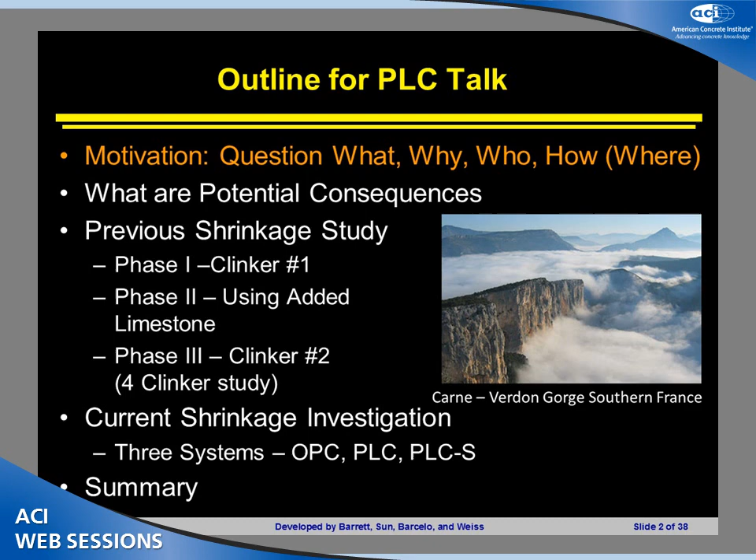What I want to really do now is talk a little bit about the motivation, talk about the who, what, when, why, how of Portland-Limestone cement, and then I really want to jump into discussion on shrinkage because this has come up at several of the different talks. I think there was a lot of information presented before in Toronto, and I think Paul did a very nice job talking about some of the other properties.

So today I really want to focus on shrinkage after we get through the basic motivational questions. As Paul mentioned, Portland-Limestone cement is now currently in the cement specifications, ASTM C595 and AASHTO M240. Here's a picture of a typical Portland-Limestone cement. When you look at it in the microscope, the particles aren't actually different colors like this—that's been added afterwards—but it gives you an idea of what's going on. Basically, the white particles here are the typical clinker portion of the cement, and the yellowish particles are the limestone in this case.

Paul covered quite a bit on the background, but we're looking at really 5 to 15% additions. One of the things I will keep coming back to when we talk about PLCs is that we're really talking about interground materials. I will give a slide or two on materials where limestones have been added, which is a little bit different than the interground materials. But what we're really focused on here is interground limestone as part of the production process.

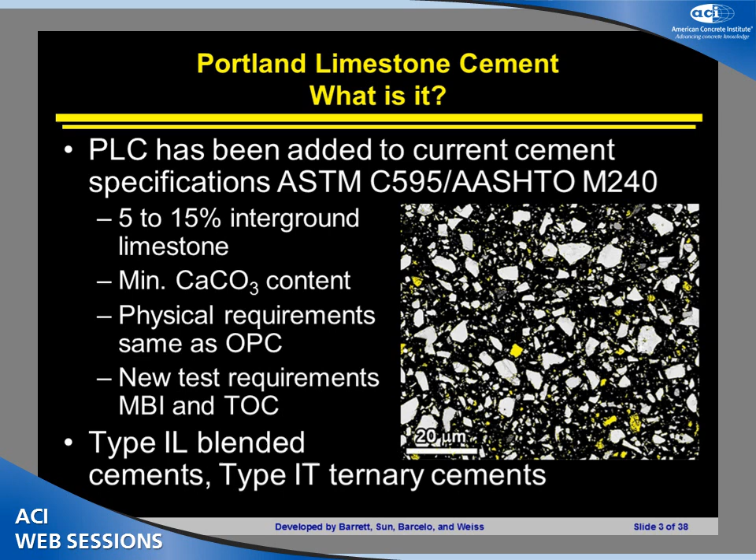The next question, now that we know a little bit about what it is we're talking about, is why do we want it? The real reason is really looking at the sustainability issues associated with cement production. You hear people talk about numbers as high as 7 or 8%. Here you see a pie chart where the numbers are about 5%—5 to 8% of the world's CO2 production comes from the cement and concrete industry.

And you may say, wow, that's a really high number, cement must be awful. Well, one thing we have to remember is concrete itself has a relatively low carbon emission, but the fact is we use an enormous amount of it. We use a lot more than any other material, and even though we have a low carbon emission, we're looking at ways to make this better, because if we can reduce this number, that's good for everything.

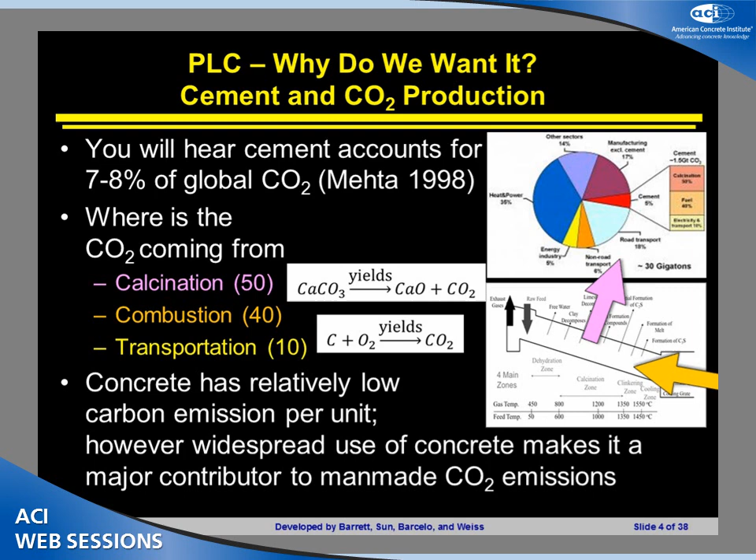About 50% of that CO2 is coming from the calcination process, 40% is coming from the combustion process, and 10% from transportation. If we can replace some of that clinker, we can really act to reduce some of the CO2 coming from calcination, some of the CO2 from combustion, and substantially reduce the CO2 being produced with that concrete. So the real big takeaway on why we want it is, again, the sustainability issue.

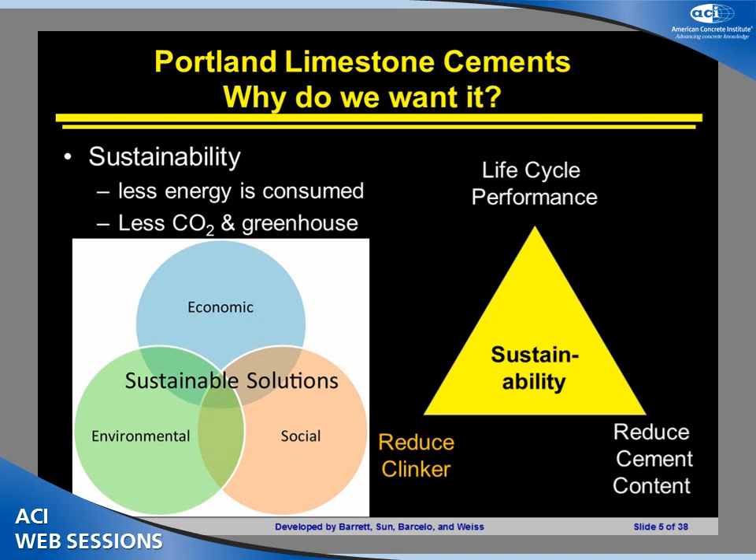So I would say there are three main areas we can focus on. We can reduce the cement contents in our mixtures, and I think this is a good thing not only from a sustainability issue, but there are cost benefits and durability benefits in doing that. We want to make our concrete structures last as long as possible, but what we're really looking at in this talk is the ability to reduce the clinker and get the same performance. If you can reduce the amount of clinker, reduce the amount of CO2, and get similar performance, it seems like something we should at least be investigating.

The question is who has done research on this. One of the topics that comes up almost every time we talk about this is, wow, this is something new and radical. Has anybody ever looked at this before? There are over 1,000 papers on Portland limestone cement.

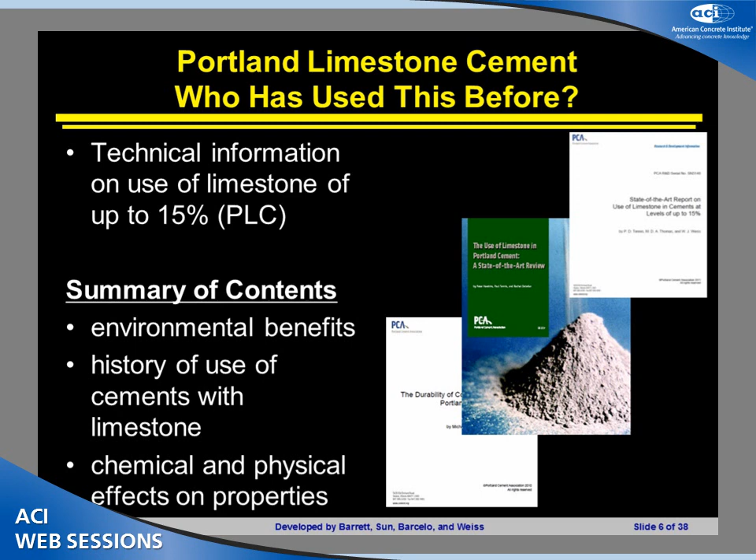One of the nice things that's happened is there have been several review sessions where people have gone through and assembled these documents, and I believe all of them are free of charge. They've taken all the information and put it together. You can download this information or contact any of the authors, but I think they all do a fairly good job of summarizing what's out in the literature and what the rest of the world has experienced with Portland limestone cements.

One thing I'll slow down to talk about is really the how, because this differs from what we see in a lot of different applications. In the North American experience, the real thing we keep coming back to is we're targeting similar performance to OPC. So one of the things we keep coming back to is that we're using less clinker.

By using less clinker, we have less clinker in the system, so we're diluting the clinker a little bit. Typically what we're going to see is the cement is ground finer. So in general, Portland limestone cement is going to be ground finer than OPC. One of the reasons for this is to overcome dilution.

So if you look at a normal strength development curve for OPC and compare it to PLC, we're grinding it a little bit finer. We're going to see more rapid strength development initially, and then we're going to see that rate of strength gain slow down a little bit. But this is mainly influenced by the fineness of the material.

The higher fineness helps us because it can act like a nucleating agent, as Paul mentioned. It also helps us because it can improve particle packing. The other thing I'll mention is, and there'll be a talk on this tomorrow, PLCs show substantial benefits when you start using them with other supplementary materials.

We'll talk a little bit about that today with slag. Tomorrow we'll talk extensively about that with fly ash, where you can see substantial benefits. So even though we typically say similar performance, there are times where that performance can be greatly improved.

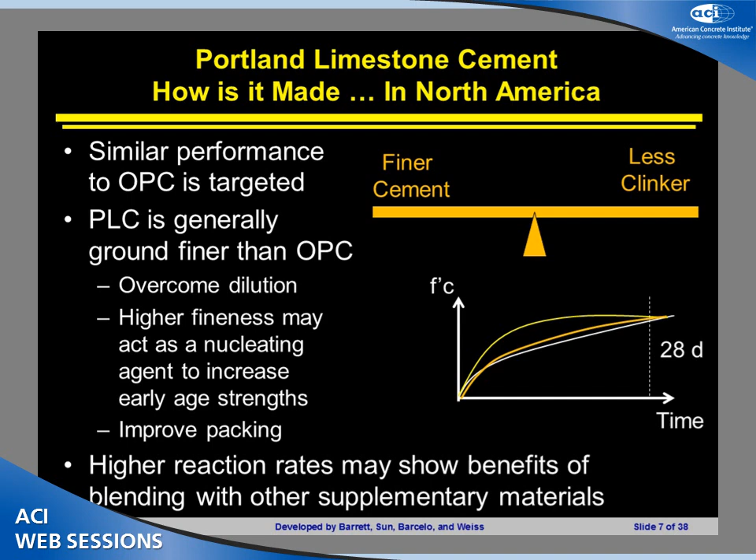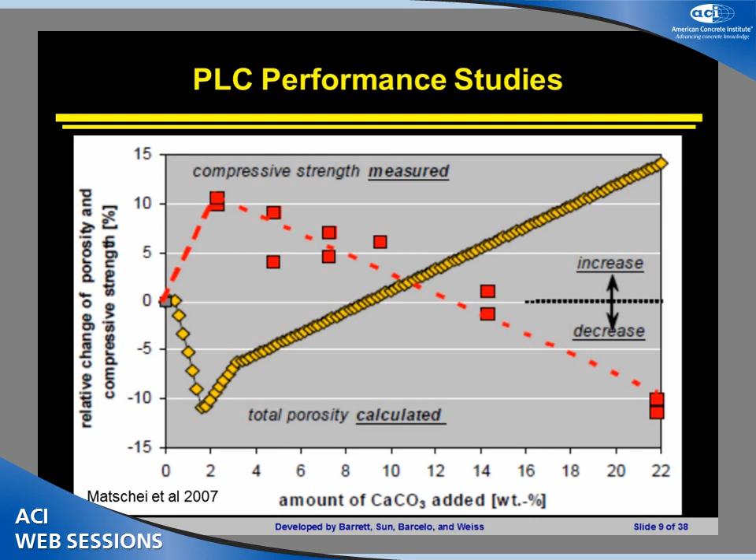So a couple things we'll talk about are really what are the potential consequences of using Portland limestone cement. I'm going to skip this slide because I think Paul did a great job talking about the reduced porosity and increased strength. But I really want to get into this discussion of fineness and shrinkage.

One thing I really want to talk about here is there are a lot of reports that say finer cements crack at earlier ages. I'm not going to dispute that with a lot of those authors, because we've authored a lot of those papers too. This is something you can see if you go about this with conventional OPC types of mixtures. Blaine fineness is often used in these studies, and that's often the single measure that we've got.

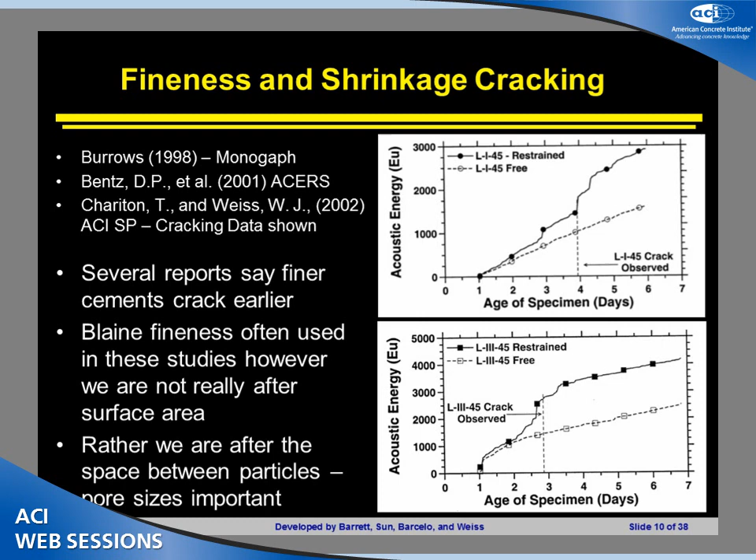I think one of the things that's going to become really evident as we look at this is that Blaine fineness gives us a number, but may not give us the complete picture of what's happening in terms of how these materials behave. So here's a typical OPC that's ground finer, and we see the age of cracking move from about 4 days up to about 3 days. But remember, that's a conventional OPC system where all that's been done is the clinker is ground more and more fine. I think we need to get into this a little more to understand what's going on with Portland limestone cements.

Before we get into lots of data, I want to point out Thomas Young and the Marquis de Laplace. One of the equations we're going to keep coming back to is what's known as the Young-Laplace equation.

Really the idea here is we can relate the stresses that develop inside of the capillary fluid to the surface tension of the fluid, a contact angle, and the size of the pores that start coming up inside of the system. We're going to keep coming back to this idea because what I'm going to talk about is fundamentally rooted in this equation, where if we understand the pore size distribution and how we're modifying the pores and what size pores we're modifying, we can get a direct implication on what we're doing to the shrinkage of the system.

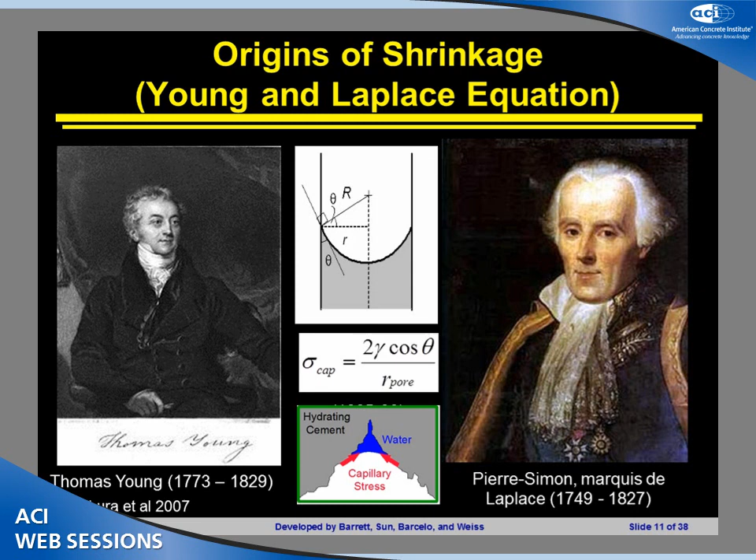To take Young-Laplace to a slightly different level, most of us will remember in second or third grade getting 2 glass slides and running over to a microscope, putting a bug or something disgusting in there, and looking at it. Then you tried to pull those 2 glass slides apart and it was virtually impossible, especially with a drop of water in between those 2 slides. You've got 2 silica-based sheets with water in between them, and high surface tension holds those 2 layers together. That's the same thing we have going on inside of the pores in our system, and this is really what is going to drive the shrinkage.

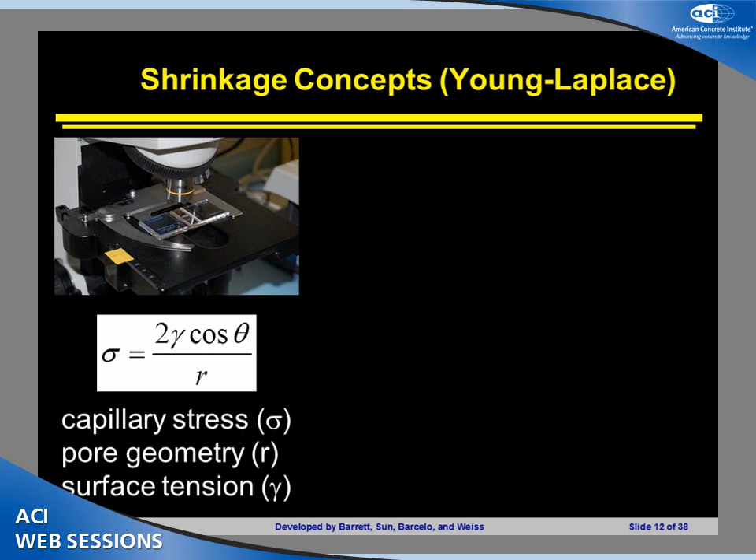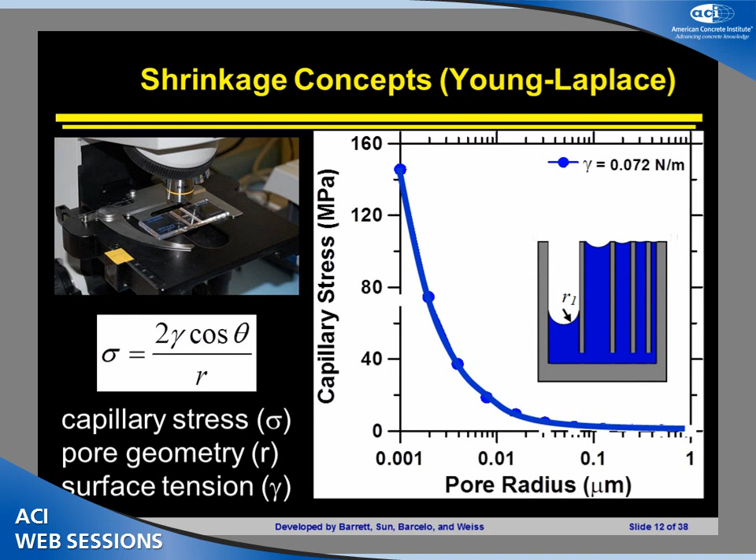Again, same equation that we looked at before: the stress is related to the surface tension divided by the pore sizes inside the material. We will keep coming back to some general plots, but here you can see the idea - the stresses are relatively low with big pores, and the stresses get much, much higher as you get to smaller pore sizes.

Shrinkage is really related to the size of the pores that's emptying. Pores smaller than a few nanometers, we worry about other things. Pores bigger than about 50 nanometers aren't small enough to generate significant stresses. So we're going to focus in on this region - from about 3 nanometers up to somewhere around 50 nanometers is really the range we're interested in for most of the shrinkage we're going to be talking about.

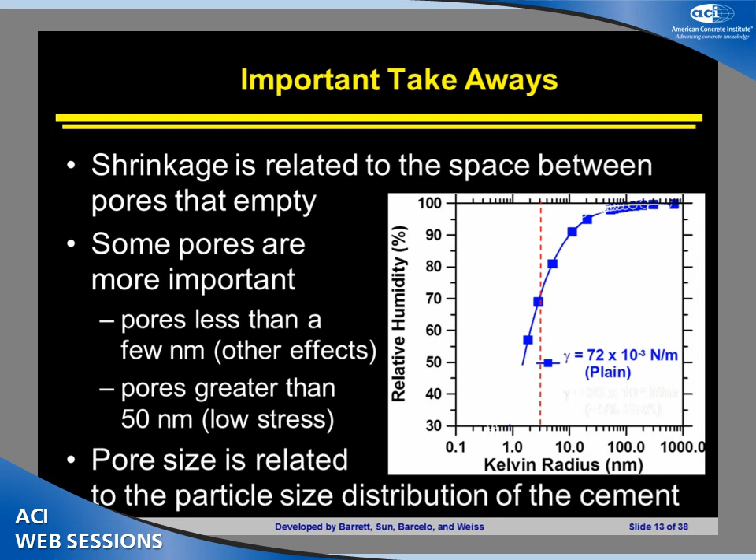Now I want to point this out quickly, and I'll ask you to remember this particle size distribution curve. Here you can see a particle size distribution curve for conventional Portland cements, from one of the studies I mentioned that said finer cements are more prone to crack. What I want to point out is as the fineness has been changed, these curves shift pretty substantially toward the left-hand side of the screen, and the whole curve slides relatively uniformly. I'm going to try to contrast this with what we see in the PLC systems to show you that we get a different particle size distribution, and as a result, a different pore size distribution inside of the material.

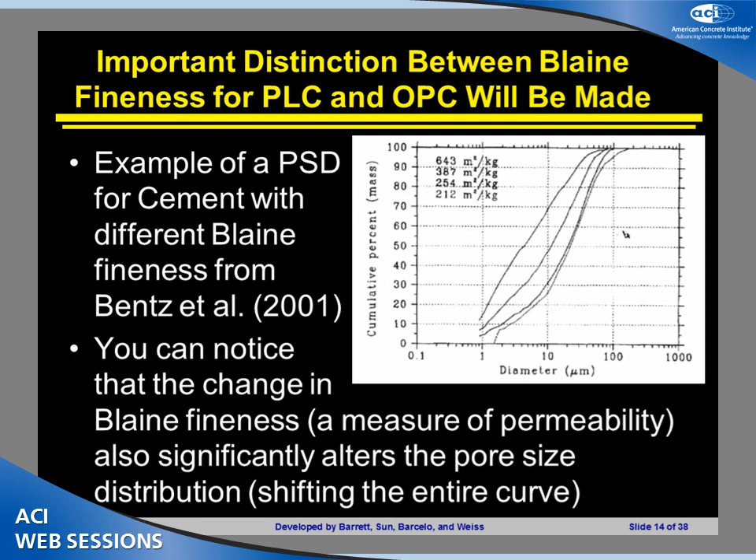So now I'm going to talk about a couple different systems, going through what's probably been a 5 or 6 year study, and we're going to talk about different clinkers. We've got up to about 7 or 8 different clinkers looked at from different commercial plants that I'm going to try to combine into here. We'll talk about these in terms of different phases, but this was not a well-orchestrated 3-phase project when we started - it was, we'll test this particular cement, we'll test that one. Now we're going to go back and look at some of the similarities we've seen in this information.

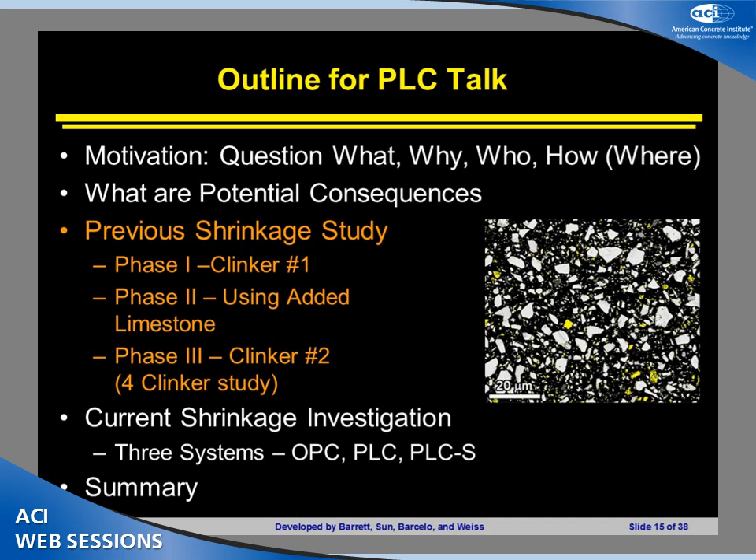One of the first ones we looked at is a commercially ground blended cement - a Portland-Limestone cement, ground looking at 0, 5, and 10% limestone additions. The red line is 0% limestone, the blue line is 5%, the green line is essentially the effect of dilution, and the black line is 10% limestone. If we look at the autogenous shrinkage, we've got very similar shrinkage - no additional shrinkage coming from the ground limestone, even though the Blaine fineness has gone from 382 up to 461. So even though it's finer, we're not seeing additional shrinkage in that system.

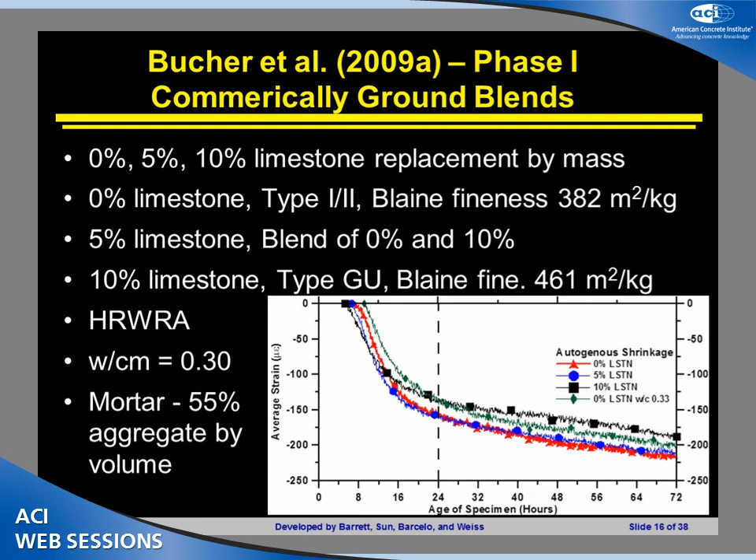In addition to this, we've used a ring test, and I will come back to this a little bit later on.

The ring test is not just to quantify the length change, but to quantify the cracking potential of the material. The idea is we cast a concrete or mortar around a steel ring.

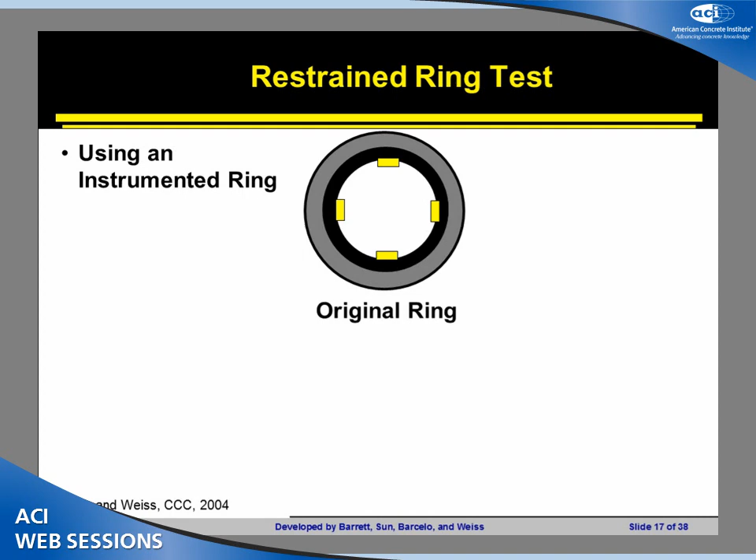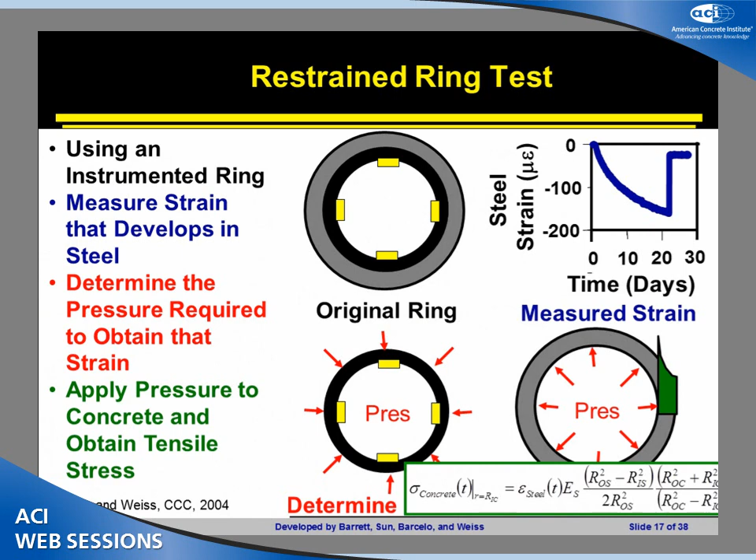The concrete wants to shrink and get smaller, but the steel prevents that from happening. We can measure the strains that develop inside the ring, and use those strains to calculate what the pressure had to be to produce them. We can turn that around and say this is what the pressure and stresses are inside the concrete, which gives us a very quantitative way to talk about stress development in these different concretes.

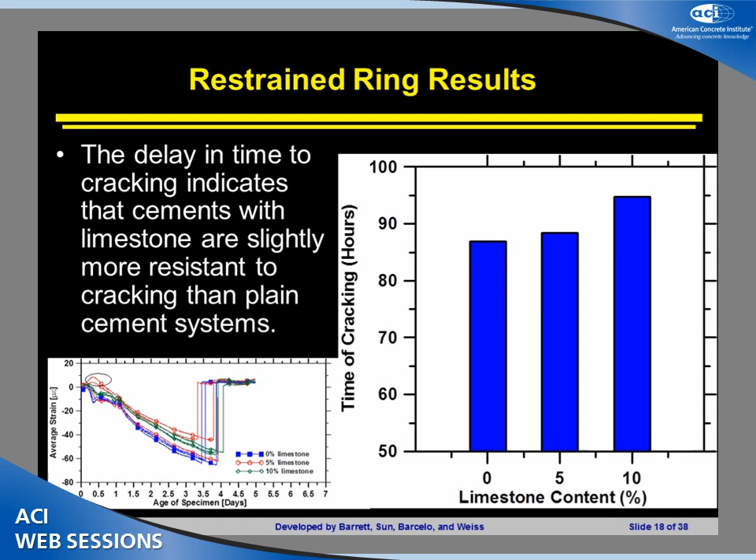One of the things we can look at with these different PLC mixtures: we see a lot of different lines here, the blue is the plain system, the red is 5% limestone, the green is 10% limestone, showing age of cracking. Again, with finer cement, we don't see an increase in the cracking potential, or an increase in the strain or stresses developing inside the system.

One of the other things we did in this study is look at the long-term shrinkage of these samples. We took samples about the size of a piece of chalk, about 4 inches long and 12.5 millimeters in diameter, put them in a CO2-purged environment, and left them for about 160 days to get the full shrinkage out of these pastes.

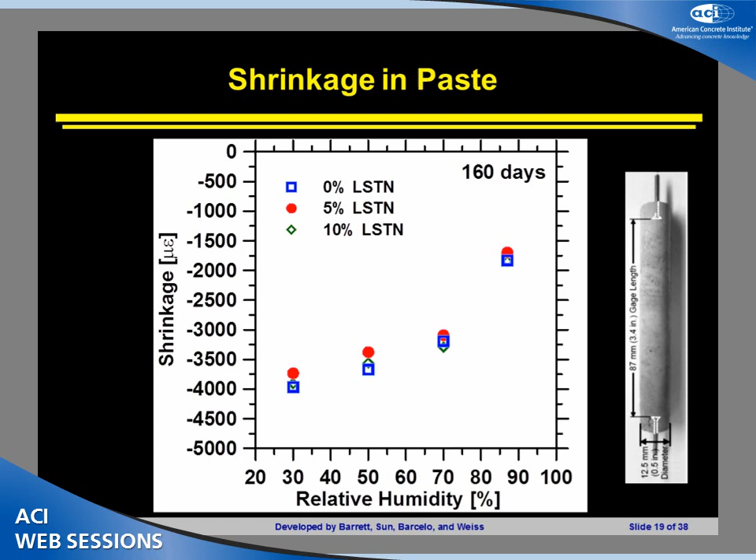What you can see with 0%, 5%, and 10% limestone is the results all lie on top of each other within the statistical variability you'd expect. The main point I want to drive home is that even though we have different Blaine fineness numbers, about 80 points finer for the 10% limestone system, we see identical shrinkage over a really wide range of relative humidities.

Now in the second study, I want to clarify some differences, because it's easy for people to get confused looking at different papers. In this study, instead of intergrinding the limestone, we added the limestone. We're going to talk about small, medium, and large limestone particles, at 3, 17, and 100 microns. I want to point out that these are not equivalent or similar performance systems, unlike every other system I'll discuss this morning.

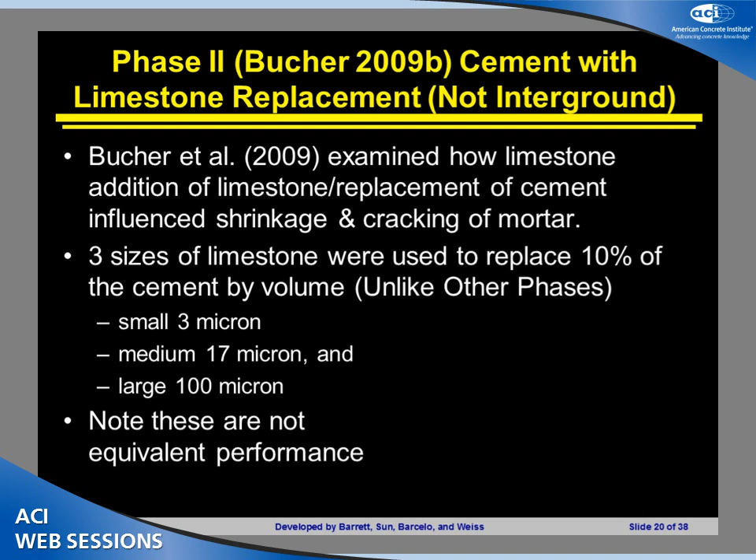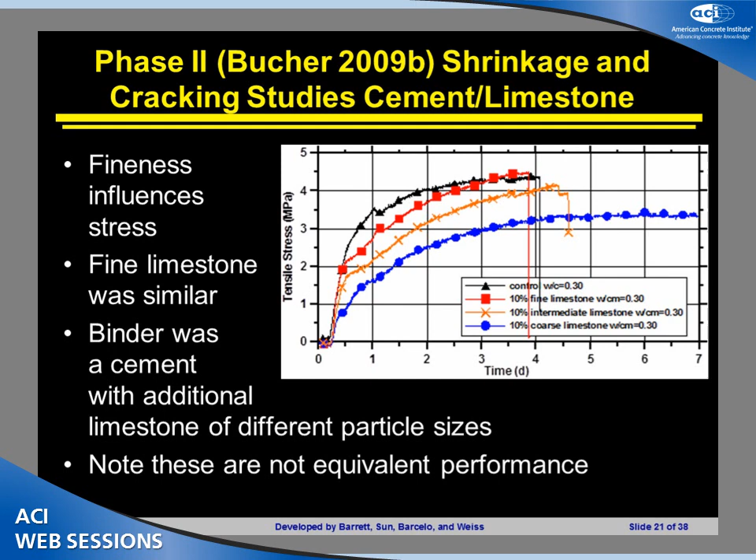When we start replacing 10% cement with 100 micron limestone particles, we notice a decrease in strength, so they're not similar like before. But when we use relatively fine limestone, we see a similar trend in the stresses developing. As we go to bigger limestone particles, reducing strength and performance, we see lower stresses developing in the system. I point this out because it's a different system than the PLC systems we discussed, since these are not equivalent cements and not interground cements.

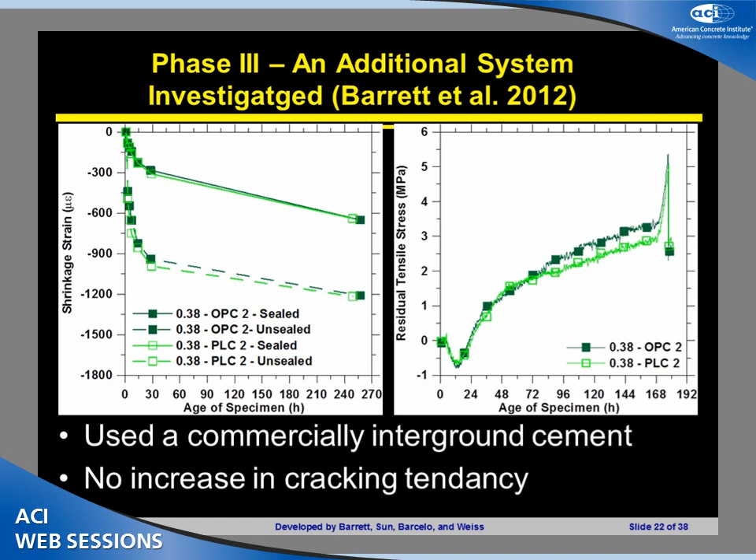The third phase is looking at a different binder, with a 0.38 water to cement ratio. Sealed shrinkage is shown here - the green and light green lines, I don't know why we chose green, I guess to stay with the theme. These are the drying results down here, and these are the sealed shrinkages, and you're hard-pressed to see a difference between those lines. If you move over to the stresses developing in the system, you see maybe a slightly higher stress in the OPC, but they're relatively similar for the sake of what we're discussing.

I want to get into more detail on the final study we've looked at, where we examine the shrinkage and cracking potential in three systems: clinker with limestone interground. All the interground materials discussed here are interground commercially, which uses very different technology than intergrinding in a ball mill in your lab. We're going to look at a 0.39 and a 0.34 mixture, and for time I'll only show the 0.39 mixture with 55% by volume sand.

Here we've got an OPC which has about 3% limestone, a PLC which is 11% limestone, and a PLC slag system which is 10% limestone and 12% interground slag.

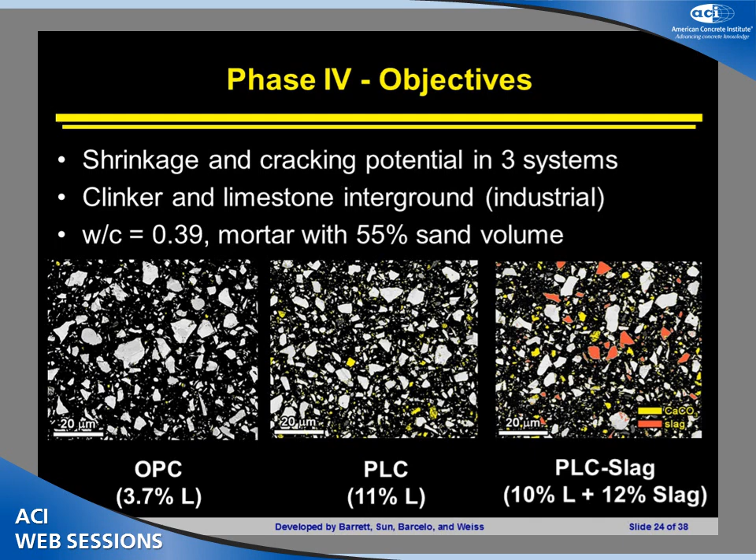So to talk a little bit about this, I want to show particle size distribution, talk about reactivity, talk a little bit about shrinkage, and then the cracking potential.

So the particle size distribution - I want to compare and contrast this to what you saw maybe 10 slides ago. I pointed out that in a conventional system, if you change the Blaine fineness, the curve marches over to the left as it gets finer. Here you can see there's a slight shift to the left, but not that parallel shift. If you look at the frequency distribution, or the derivative of this curve, we're losing a lot of these big particles - 30, 40, 50 micron size - and replacing them with smaller particles in the 2, 3, 4 micron range, and those are the ground limestone.

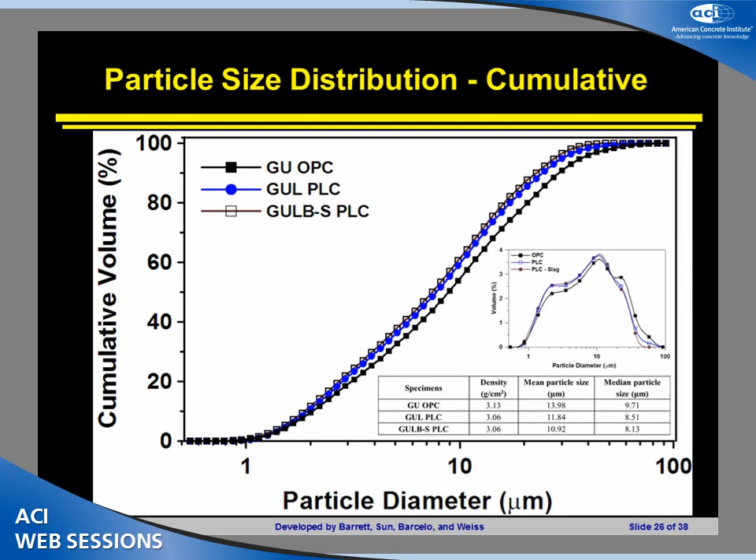So what we're doing is getting rid of, on a microstructural level, the basketball size particles. We're getting a lot of softball size particles, and we're ending up with a few ping pong ball size limestone particles in the system.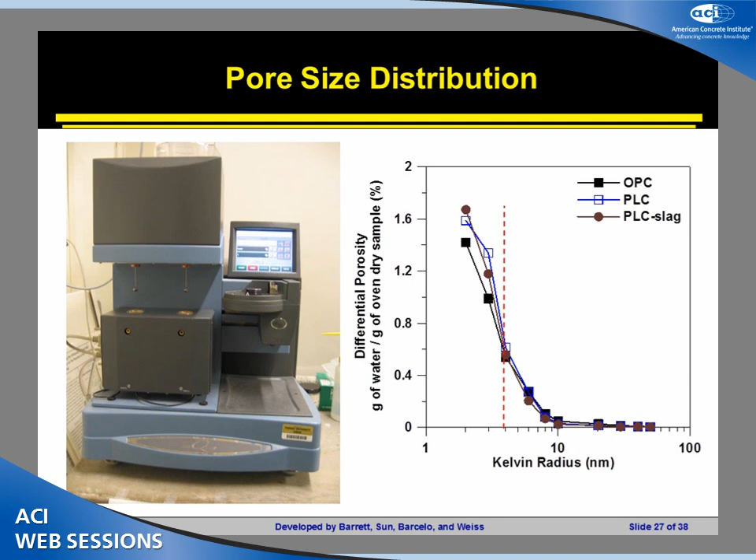We see a slight difference with the PLC and PLC slag systems at about 55% relative humidity, where you might see a slight increase in the volume of pores. But in general, these pore size distributions are very, very similar, even though the Blaine fineness numbers are very different in those cases.

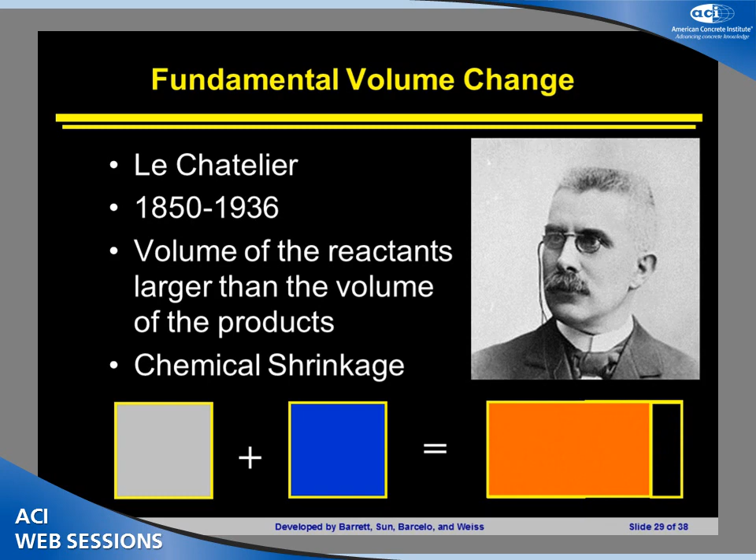So chemical shrinkage - to talk a little bit about this - chemical shrinkage is just a volume reduction associated with reaction. You start out with 1 volume of cement, 1 volume of water, and you end up with something like 1.86 total volumes when the whole system reacts.

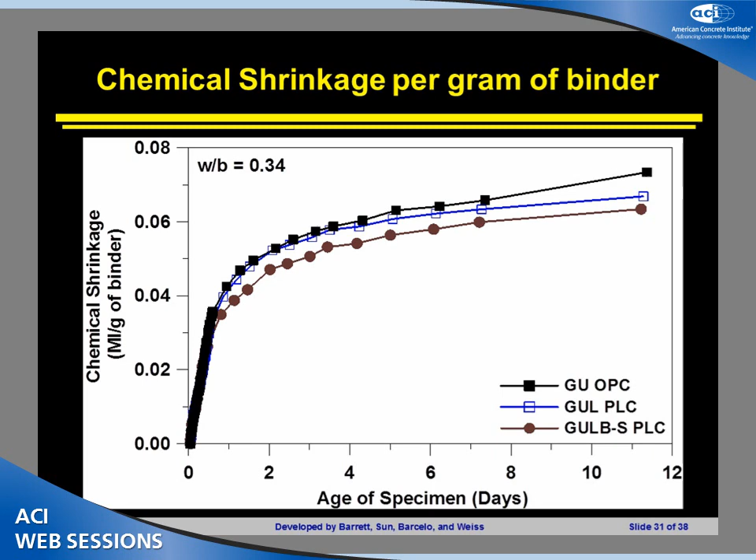This has been observed for a long time, but I want to point out that if we look at chemical shrinkage by binder - by clinker and ground limestone - we notice very similar amounts of chemical shrinkage, very similar reactivity during the first week, with the OPC maybe slightly higher. This is similar even though the system has been slightly diluted, because we've got a more finely ground material - the PLC system is more finely ground. We see the slag system is a little slower due to the slag, but it starts to catch up toward 28 days.

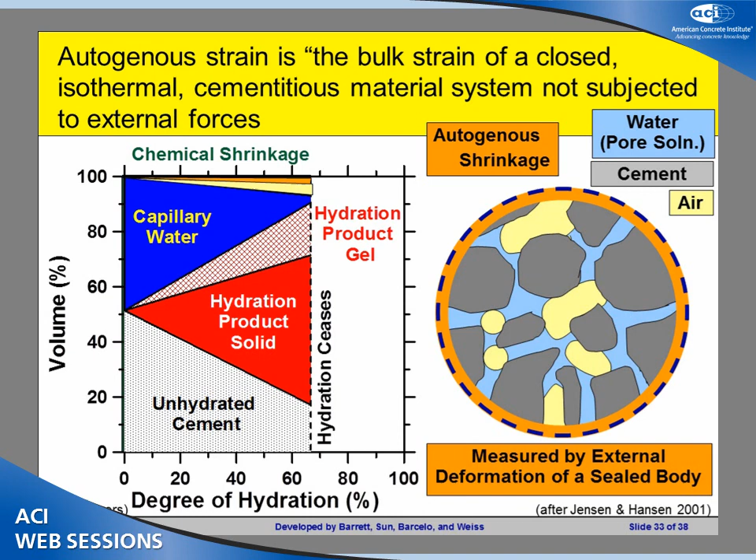The autogenous shrinkage of this system - autogenous shrinkage is simply the shrinkage of a closed system that's not losing moisture to the outside, and not subjected to temperature change.

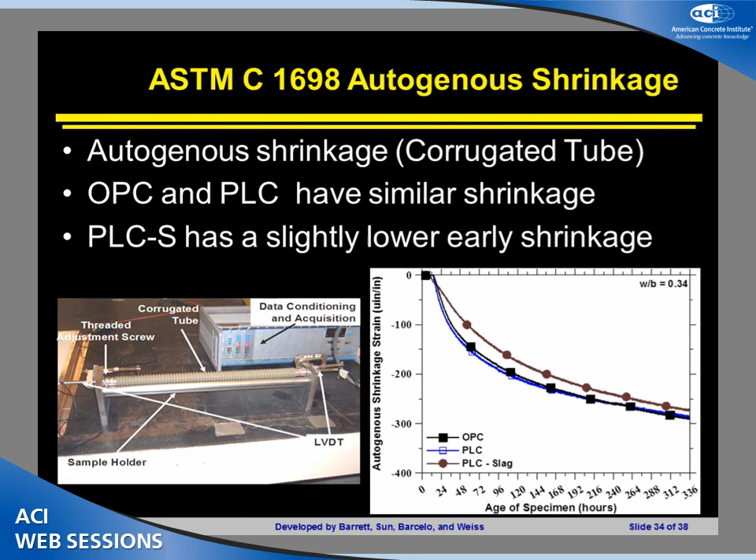If we look at this shrinkage from the time of setting, the black line is the OPC, blue is the Portland limestone cement, brown is Portland limestone cement with slag. Out to 2 to 3 weeks on this curve, we see very similar shrinkage with the slag being slightly slower, as we'd expect because the slag is slightly slower to react.

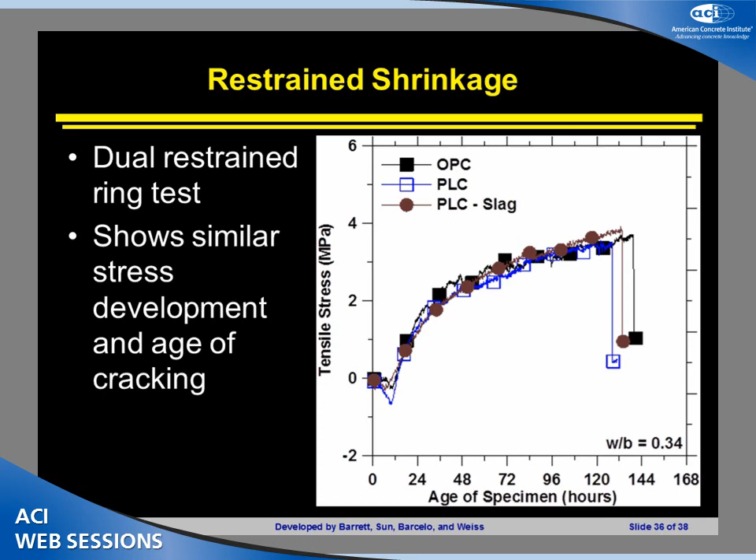So for the main conclusions on particle size and particle size distribution, the big thing we see in the PLC and PLC slag systems compared to the OPC system is really less big particles and more small particles, being the ground limestone. It's really the ground limestone that's the fine particles.

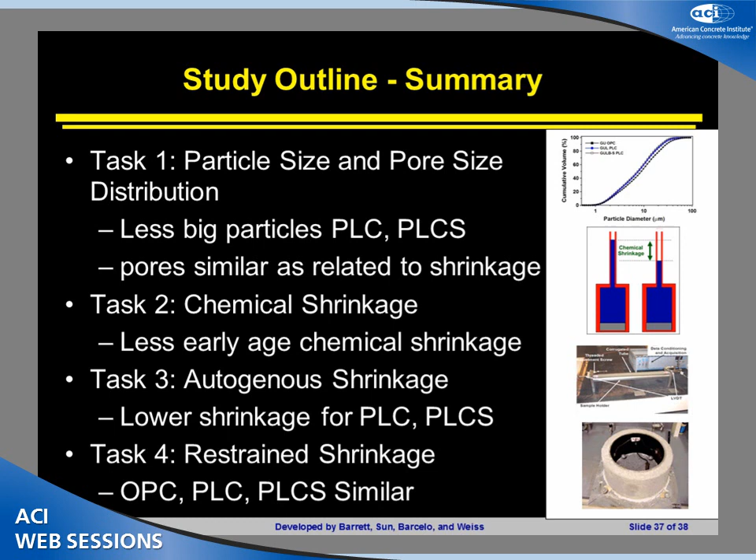The pore size, though, as it relates to shrinkage, is very similar in these mixtures, which means we're going to have similar shrinkage, and I think we've shown that. We see slightly less early age chemical shrinkage in the slag system, but the other systems are very similar, mainly due to the finer grind. We see slightly lower shrinkage for the PLC slag system, very similar for the PLC and OPC, and very similar restrained shrinkage overall.

So the summary of the overall observations we can make here: PLC is really not just a dilution of the OPC. It's not simply taking 15% of the clinker out and hoping for the best. It's really a system engineered to have finer particle sizes to increase the reactivity of those systems and give you a very similar pore size distribution.

Because of this, we tend to see a lot of similar properties - similar strength, similar modulus, similar transport properties, similar shrinkage. It's not surprising because we've got a very similar pore size distribution that's really been engineered. The PLC and PLC slag systems are engineered differently to obtain similar performance, with more fine grinding to achieve that similar performance.

We've shown similar or less autogenous shrinkage with the PLC and PLC slag systems, and this means we have similar or less shrinkage cracking. I believe all of these observations, in addition to being experiments that have been performed, can really be explained by what we've seen with the Young-Laplace equation and the very similar pore size distribution.

So with that, I'll turn it back over to our speakers if there are any questions. Are there any questions, Mason?

I'm wondering, for one of the systems, we did the shrinkage test in a nitrogen environment - is this particular system more susceptible to carbonation? The reason the systems are done with nitrogen purge is if you take a small paste system and expose it to carbon dioxide, you're going to get carbonation shrinkage in addition to the water-based shrinkages we're seeing. It's fairly common when you do small samples like that, because they're sitting for so long, that you do them under nitrogen purge, and a lot of the older literature you'll look at does them that way too.